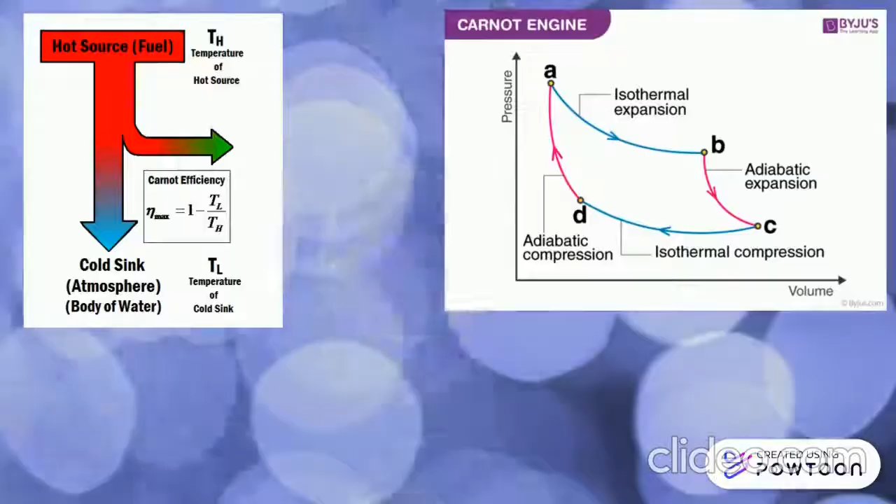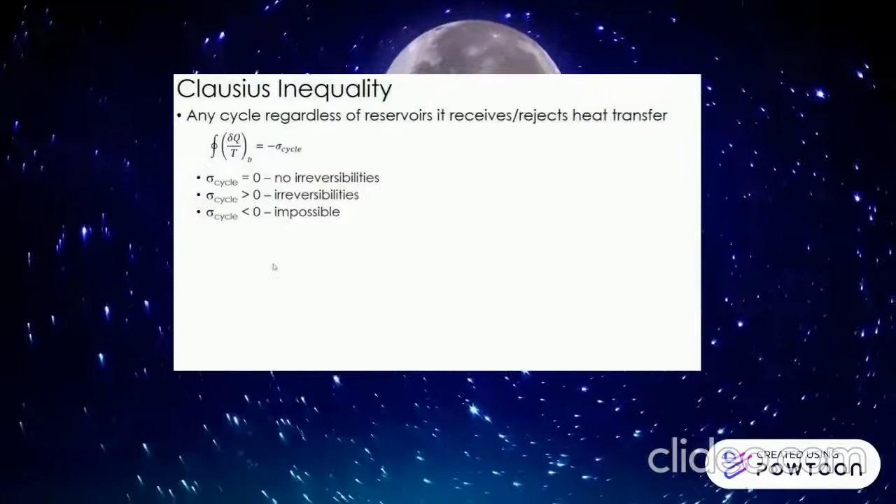The Clausius inequality for a closed system states that the process is irreversible if delta S is more than delta Q over T, and the process is reversible if delta S equals delta Q over T. Clausius's statement says that it is impossible for a self-acting machine, unaided by an external agency, to convey heat from one body to another at a higher temperature.

Kelvin and Planck came to a conclusion, so they created a statement called the Kelvin-Planck statement. However, Planck also had his own statement, which is that every process occurring in nature proceeds in the sense in which the sum of the entropies of all bodies taking part in the process is increased.

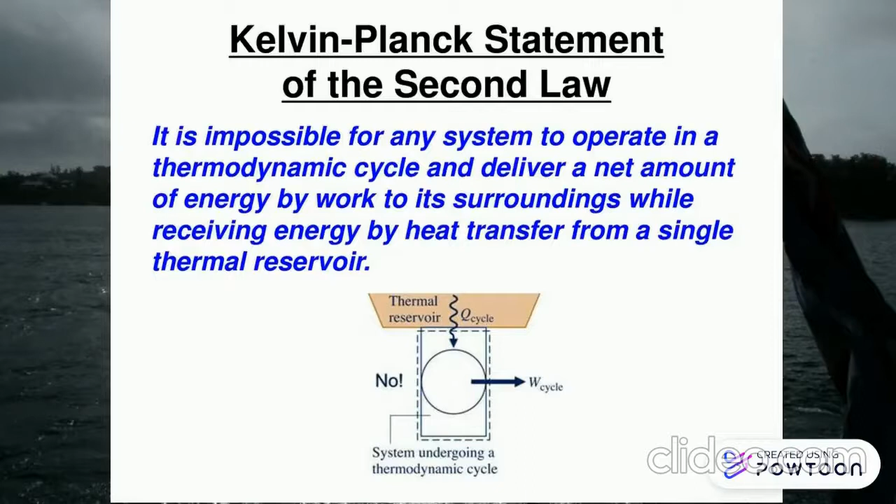The principle of Carathéodory describes the concept of adiabatic accessibility, providing the foundation for a new subfield of classical thermodynamics, also called geometrical thermodynamics.

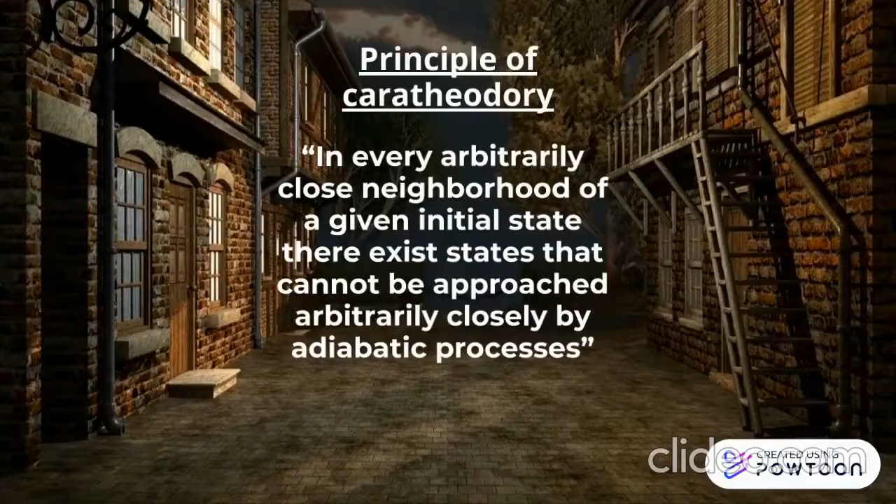An example of the first law of thermodynamics in industrial application is the steam engine power generator. But how is the first law of thermodynamics applied? The heat energy is converted to mechanical energy. After that, the mechanical energy is converted to electrical energy to generate power in the steam engine power generator.

An example of the first law of thermodynamics in commercial application is the air conditioner. Do you know how the air conditioner can make us feel cool? When a system undergoes a thermodynamic cycle, the net heat supplied to the system comes from the surroundings. The absorption of heat by the refrigerant in the air conditioning system is equal to the net work done by the air conditioning system on its surroundings.

According to the first law of thermodynamics, all energy must be conserved. Energy is conserved in refrigeration by having both an evaporator and a condenser.

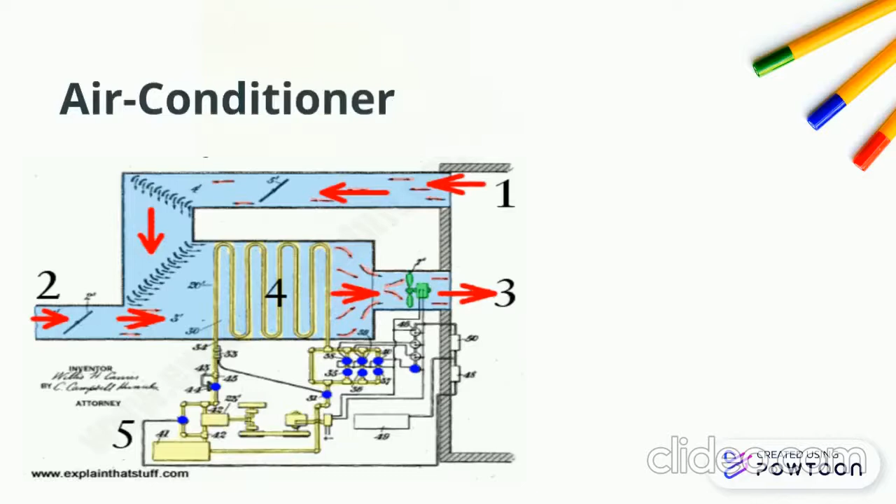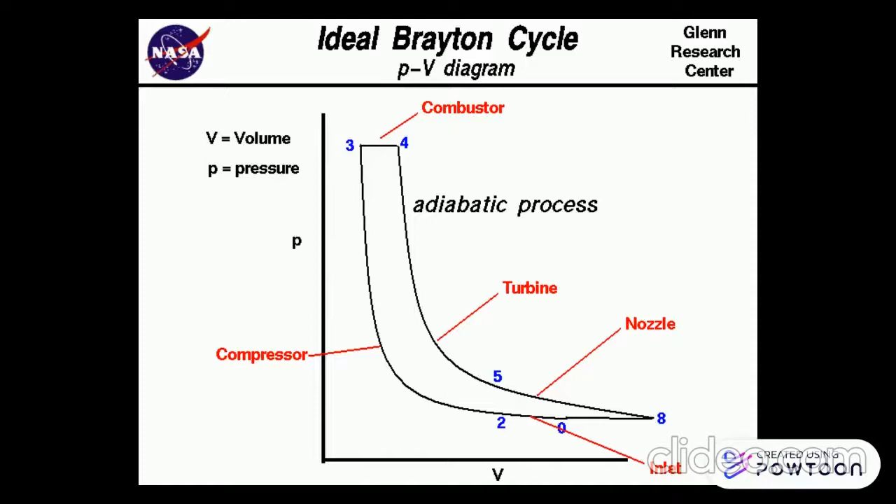The jet engine runs based on a Brayton cycle. Firstly, in the diffuser, air increases its pressure slightly. Air is compressed to a higher pressure in the compressor. Air is mixed with the fuel in the combustion chamber, and the mixture is burnt at constant pressure.

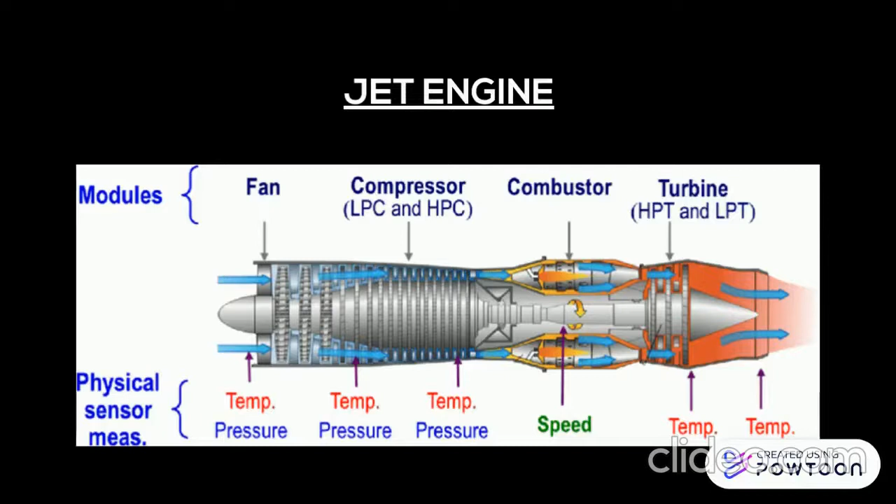The high pressure and temperature gases exit the turbine to generate enough power to drive the compressor and the auxiliary equipment. The gases expand in a nozzle to the ambient pressure and leave the engine at high velocity.

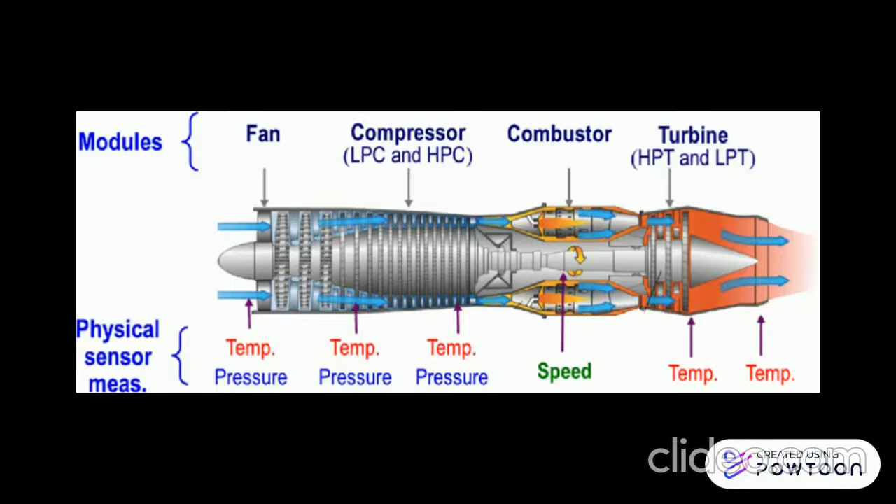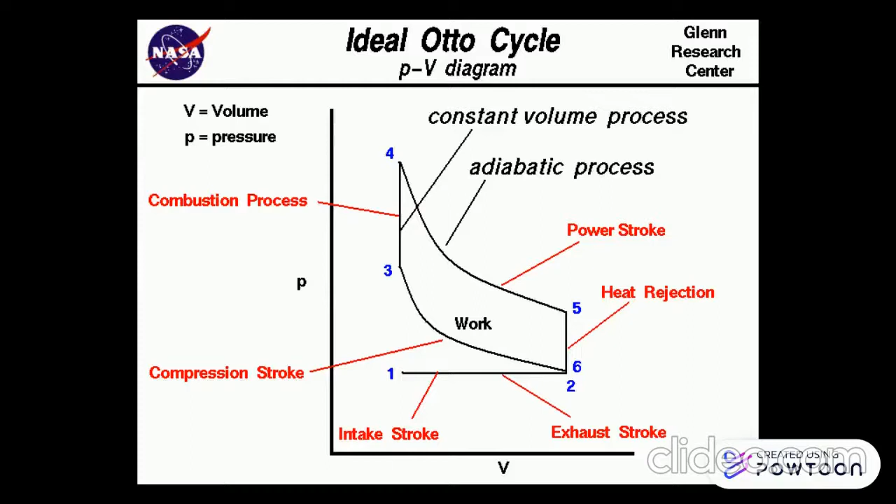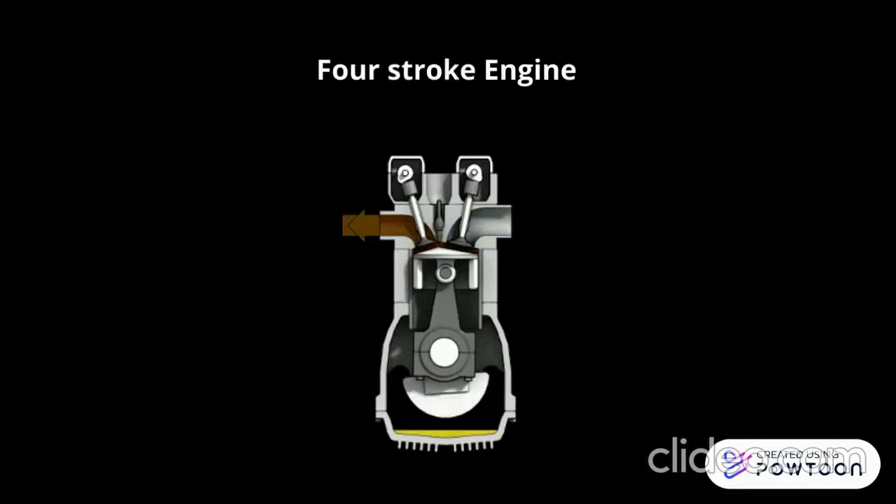This is an example of an industrial application, which is a 4-stroke engine that uses the Otto cycle principle. Starting from the intake stroke, the air-fuel mixture is introduced to fill the combustion chamber. The valve closes when the air-fuel mixture is sealed in the cylinder.

In the compression stroke, the trapped air-fuel mixture is compressed inside the cylinder. It reduces the charge from a large volume to a smaller volume in the combustion chamber. In the ignition event, the charge is ignited and rapidly oxidized through a chemical reaction.

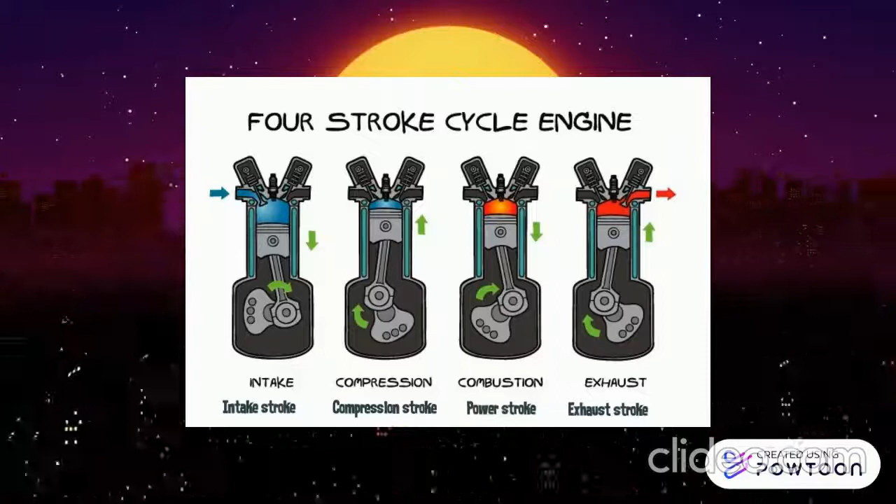And then at the power stroke, hot expanding gases force the piston head away from the cylinder head. Finally, at the exhaust stroke, gases are expelled from the combustion chamber and released to the atmosphere.